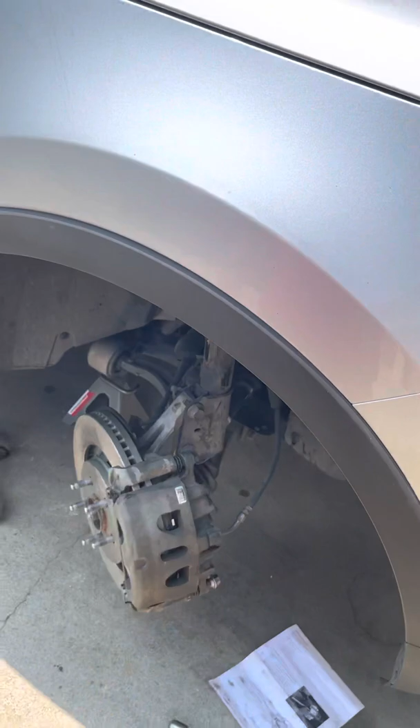Hey guys, 2016 Ford Explorer Limited 3.5 front wheel drive. These Explorers have the heavy duty rotors. I think it's 350. I'll show you guys right now. I'll give you guys more information. I believe it's 750-10 DL.

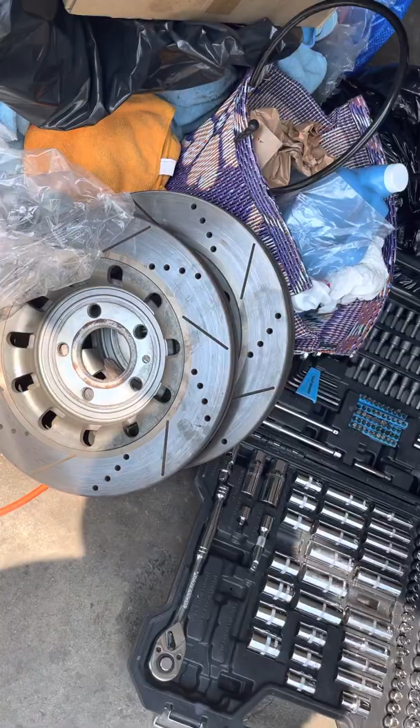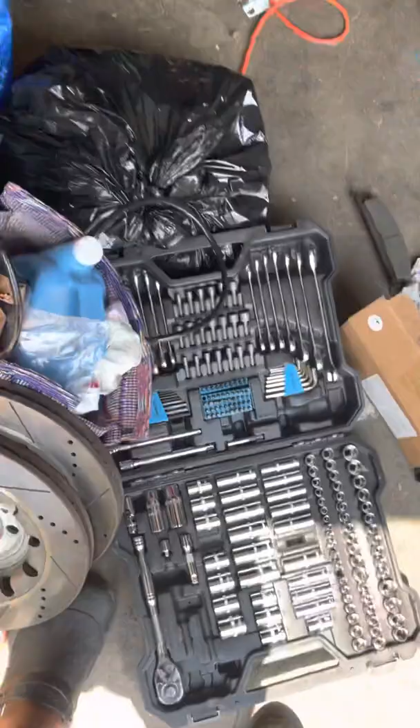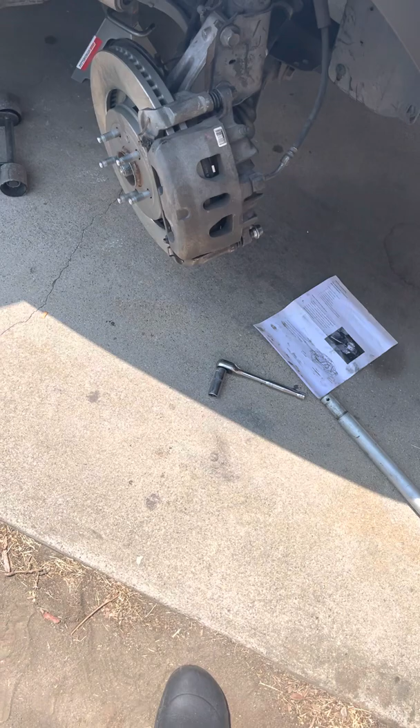Replacing those old Z23s Power Stops. I've been having trouble braking. I've been getting a vibration when I'm on the freeway and I'm getting off the freeway. Let's say you're going 60, 80 miles per hour, and then you're getting off the freeway. You suddenly have to stop, because traffic stops pretty quick. I get a vibration on my front wheels coming down to probably about 20 miles per hour. So I decided to replace the rotors.

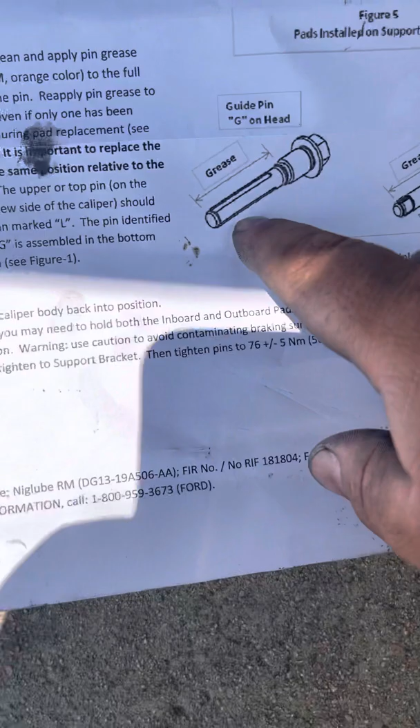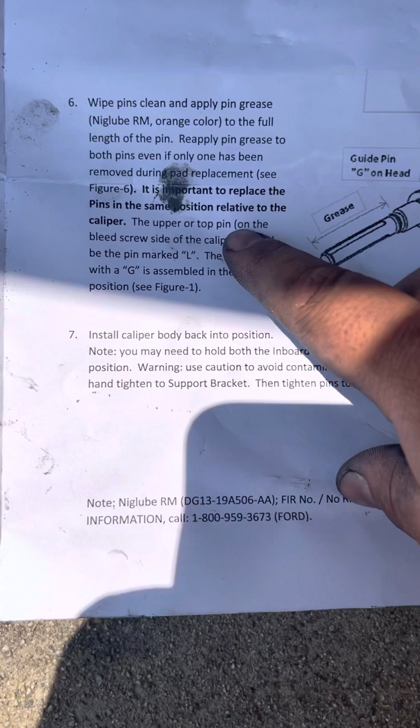Something very important. I don't know if anybody's gonna have trouble with this, but I was reading here. It says for number 2, loosen and remove both the lock pin and guide pin. See figure 1. Carefully set aside pins so they do not come in contact with other greases, fluids, dirt, etc. Lock pin L, guide pin G on head. That's pretty important because, as you guys can see, one has a rubber bushing and one doesn't. So you guys need to read this when you're replacing your brakes here.

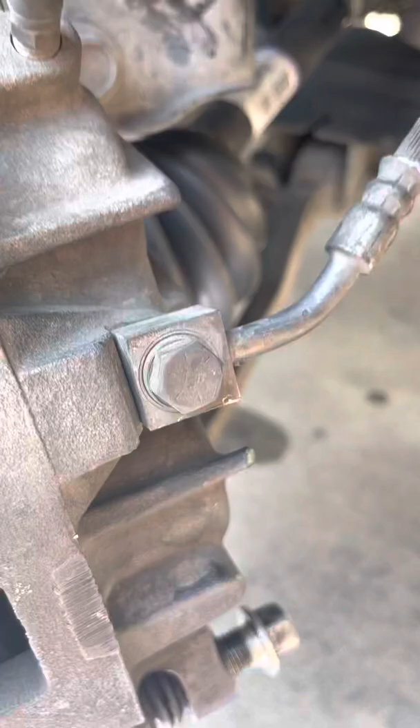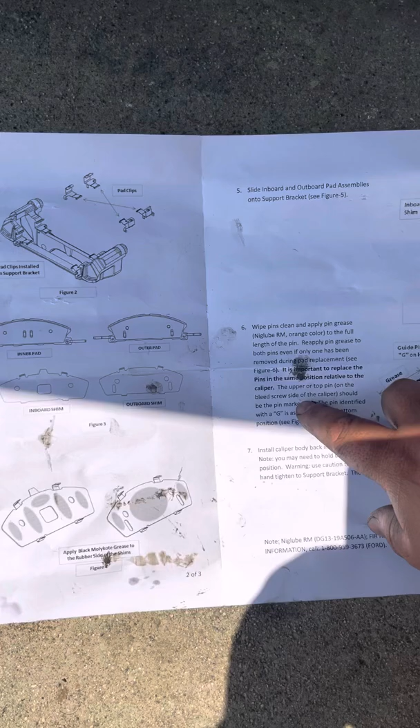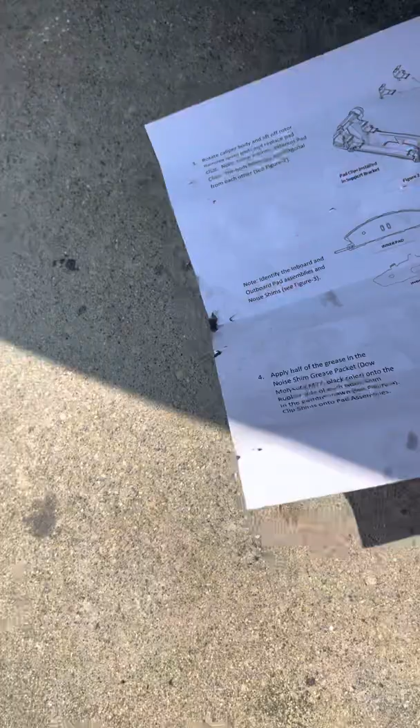The upper or top pin on the bleed screw. I'm gonna go up here really quick so I can show you guys. This is the top. This is the bleed screw right here. So this one here, the bleed screw side of the caliper, should be marked as pin L. Pin L, okay? This paper is far away from me. I'm gonna show you guys here. I'm gonna try and focus this as best as possible, but you probably won't be able to see it, but it's marked G, so that's wrong.

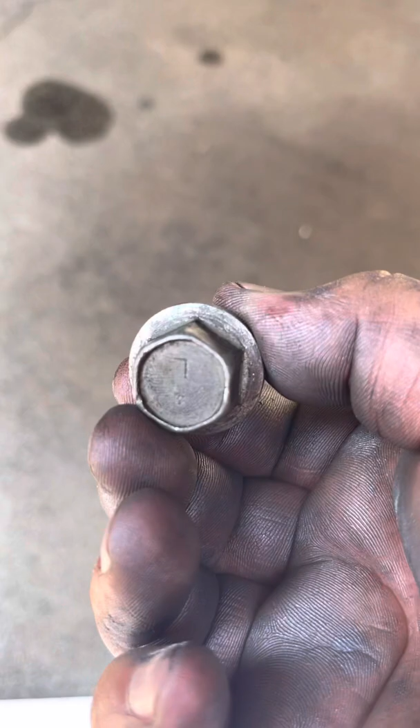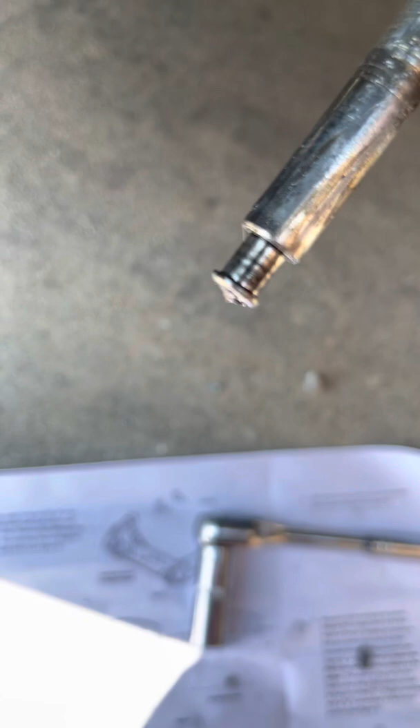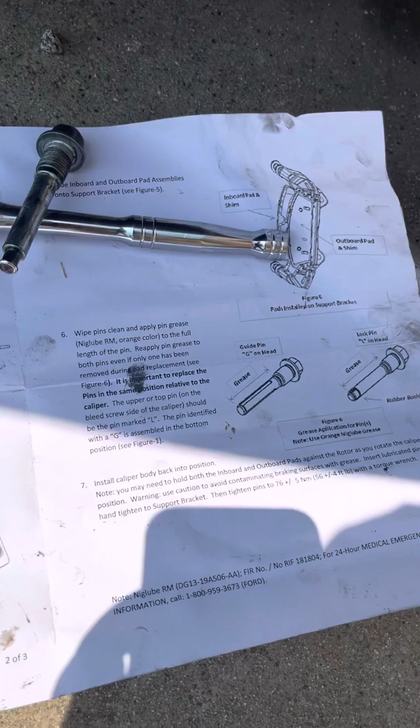That's wrong, guys. You guys can see L is on the bottom. That is wrong. So we're gonna swap it back to the top. I'm just doing this so you guys can see that these are different, and this one, as you guys can see, has no rubber bushing there. So that is not right. I don't know who did the brakes here before, but just trying to pass the knowledge on. I'm gonna get the right pins with the bushings and everything, and make sure I get that fixed. But I just wanted to pass this on to you guys. Okay.

So again, 2016 Ford Explorer Limited 3.5, heavy duty brakes, heavy duty rotors. Hope this helps you guys out, and make sure that you do the installation properly in the future.